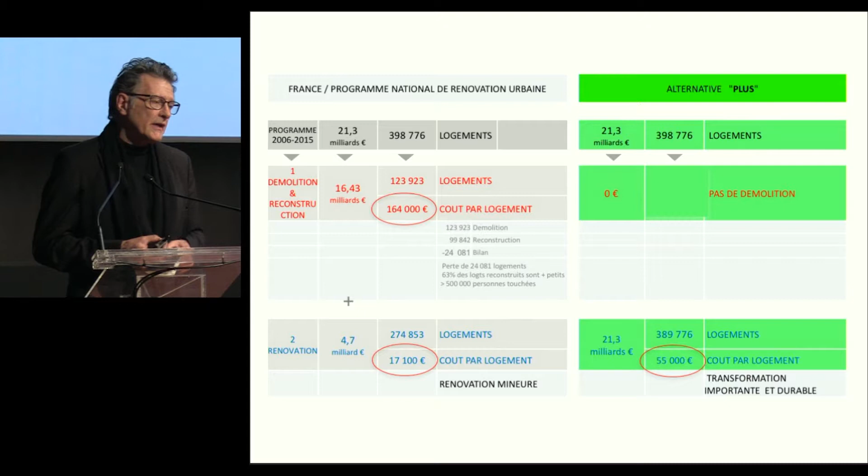traditional rehabilitation, as we've been doing this work for the last 30 or 40 years. And we know that this rehabilitation work will only last for about 4 or 5 years, simply because we keep having to demolish or redo or refurbish. We realize that, unfortunately, most of the buildings, the towers, blocks renovated in the 1980s are the ones that aged the worst and that had to be torn down first.

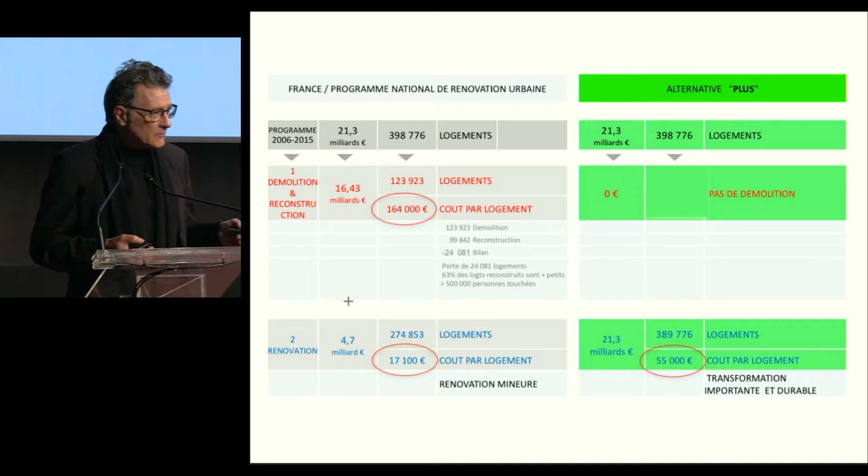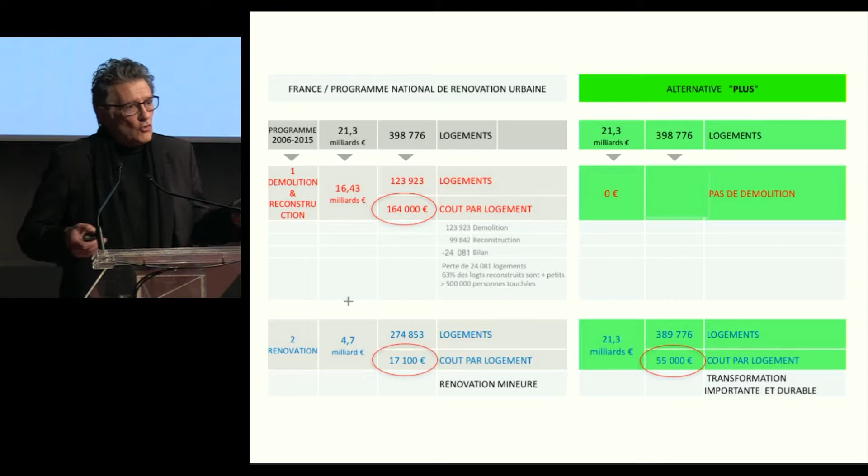So, together with Frédéric and Anne, we really tried to develop alternatives. This is what we call the Plus program, with the exact same amount of money. Rather than spending 164,000 euros per housing unit to demolish it and rebuild it, with 55,000 euros per housing unit, you could do the exact same thing, except that we will produce much larger, vaster living areas, offering a lot more pleasure and happiness to the local residents through transformation rather than demolition followed by reconstruction. So you have to look at things in a new manner.

What we have right now looks like a prison, with small windows. You have to look at things differently. We think we want to open up, give a new perspective, give more possibilities, and this brings us back to the case study house programs of the 1950s in the United States for affordable housing. One of the most beautiful villas on the west coast of the United States were created in this process.

We have to go even one step further. We have to give more freedom. After the facade, you need some space. You need an extension, you want to create a loggia, additional mobility that will give you more pleasure, more freedom, where you could go around the different cities where you live, wherever you are in the city, at whatever floor of the block or the tower.

We want to transform, never demolish, always add, always extend, always give more space, to do more and better, because that's precisely the ambition that we need. We need to do much better than the standard housing unit, much better than the so-called minimum living space.

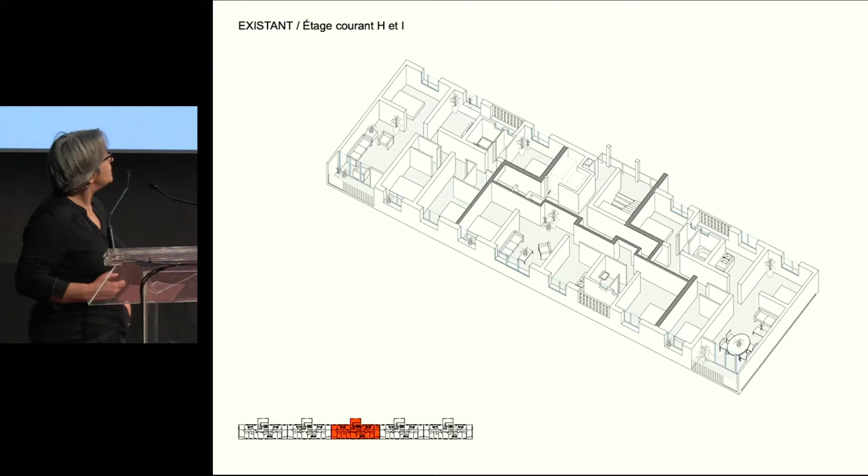So what is missing, you might argue? We're missing some space, don't you agree? We're missing some space to feel more comfortable. You're missing light, you're missing a view. You want to go out and you can't go out. You need a better facade to spend less energy. You need to renovate the lifts, the elevators, the bathrooms. You don't want to be closed off on yourselves, separated from the rest of the world and isolated.

So you want to take the existing blocks, maintain the positive values, and be very ambitious and bold in the transformation process. You want to have inhabited spaces. The 530 families are there. There is no free housing unit to house them temporarily, and there is no solution. You can't transfer them in the neighborhood in any case. So you have to do it while they live there.

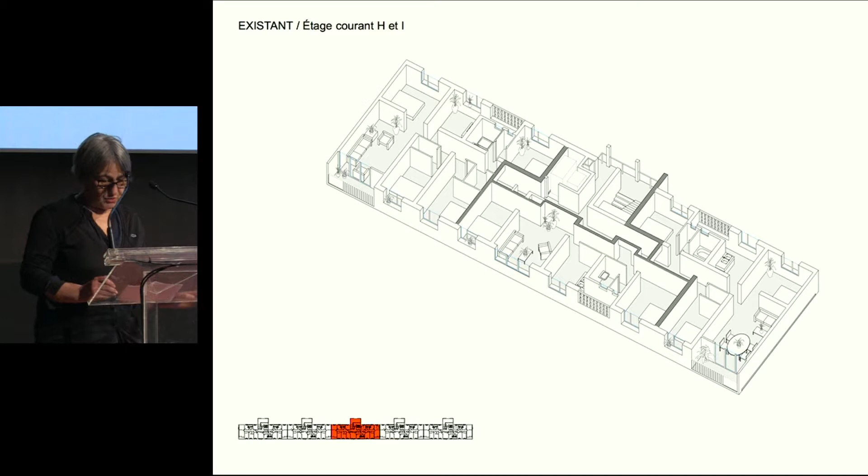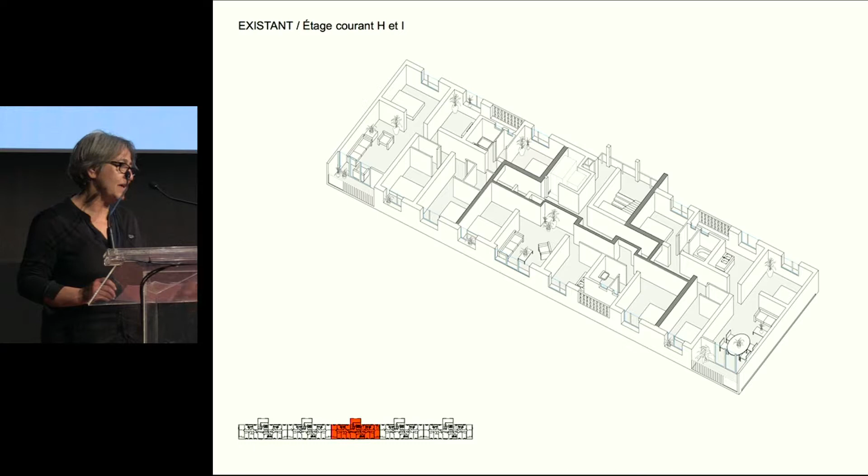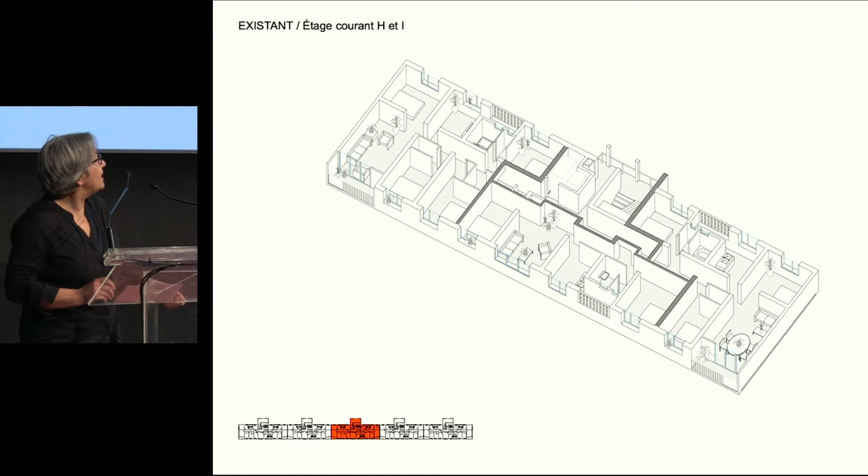So a choice was made to say, okay, we're going to try to add on what already exists, to improve on what already exists. We will touch only what has to be changed, and we have to do it as subtly and delicately as possible, avoiding interior restructuring, which is incompatible with families living there. Such refurbishment would cost a lot of money, and the remodeling money could be used to create more space instead. So we're not talking about renovation here, we're talking about adding space, and this changes totally the situation of these buildings, which should, in fact, keep their intrinsic quality.

The quality of the construction. This is only 1/5 of the major estate.

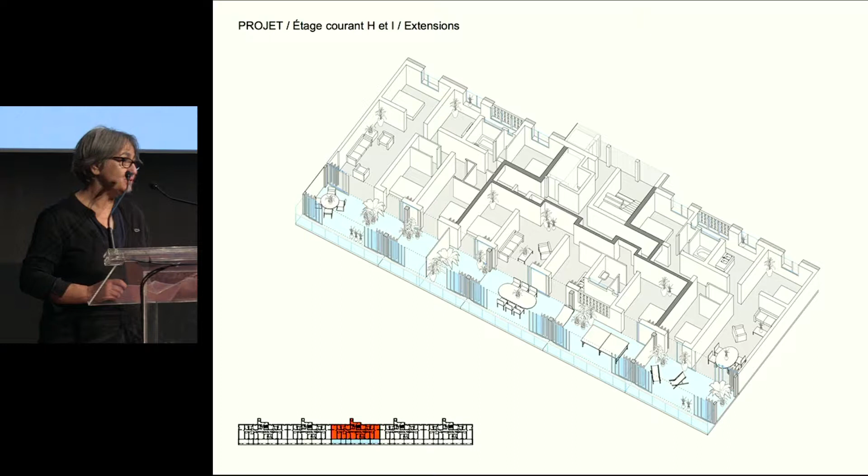We want to have an extension on the front by 4 meters, and this means adding space. You can open the space, you could go out, you could transform all of the windows into French windows, so that from the inside of every room you can move outside. You can use the winter garden and go in through different points, as you would do if you had a garden around your house.

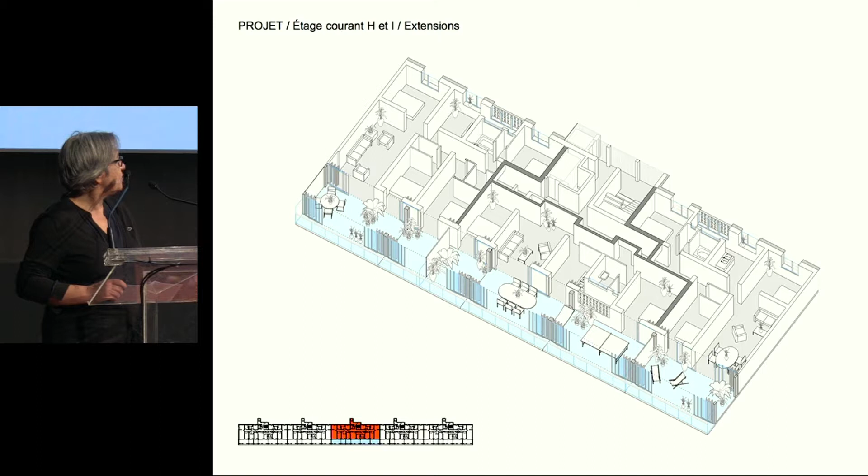Turn these small, congested, large-scale collective housing buildings into villas, into houses that will add some possibilities. Especially we have these winter gardens that are places that could be used to develop a sense of appropriation. They have thermal capabilities because they will also help regulate the problem of energy consumption.

We won't have to add insulators on the facades. It's enough to have the garden. And we can capitalize on the climate, on natural resources, rather than cutting yourself off from these natural climatic conditions. And this, of course, implies that we need to work very systematically, very precisely.

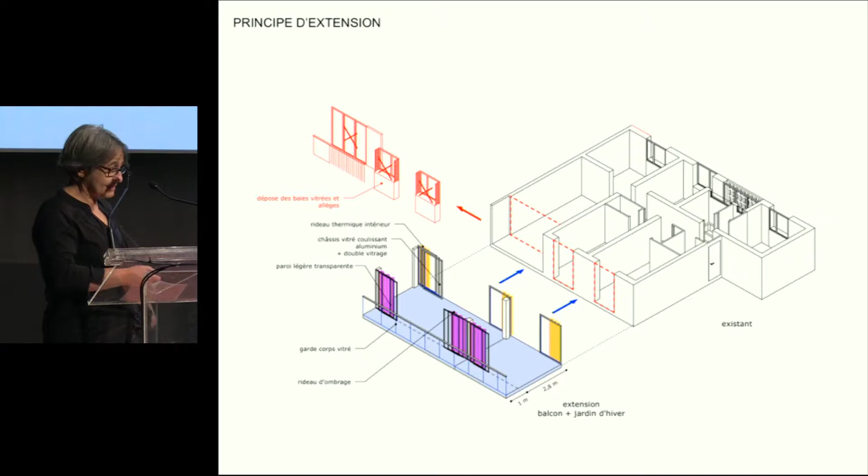The basic principle is that we add space on the outside. We have construction modules that are extending all of the facades. No selection is made. All of the facades will have this. If adding space is good for one housing unit, it is true for all housing units, not for one room only, but for all the rooms.

It is important for all the housing units to be transformed on an equal footing. So you never have to wonder about the fact that the form is different, the appearance is different, wouldn't warrant the addition of such space. It is good for everyone.

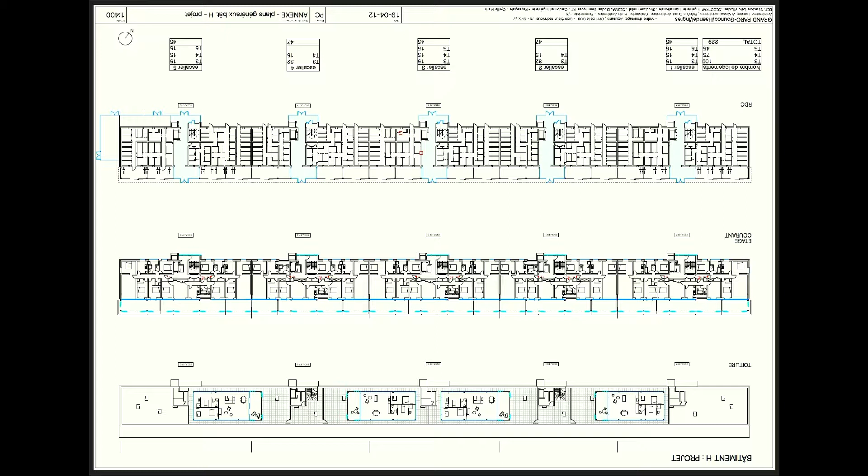And on the roofs, you have some flat surfaces that are added. You can add a few more housing units that can capitalize on all the new situations thus created.

So this is the housing scheme before and after. Doing it on one side, adding space on one side, was enough because all of the housing units had either a southern exposure or they had two exposures. And it was important because we didn't want to spend too much money.

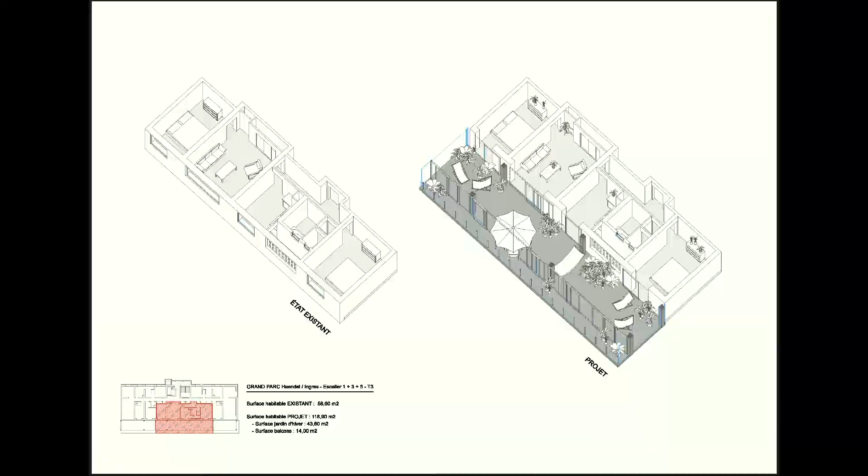All of those taking part in the competition had to spend only an envelope of 40,000 to 50,000 euros per housing unit. Everybody was free to come up with their own solutions, but within that budget envelope. So we wanted to focus on what was a priority. Giving more space, giving more light was seen as a priority.

The project was accepted. It was presented to the local residents and families, and a process was thus implemented. There was a very strong collaboration with Aquitanis, the project owner.

So, of course, we knew that some disruptions had to be taken on board, and we followed this up very closely.

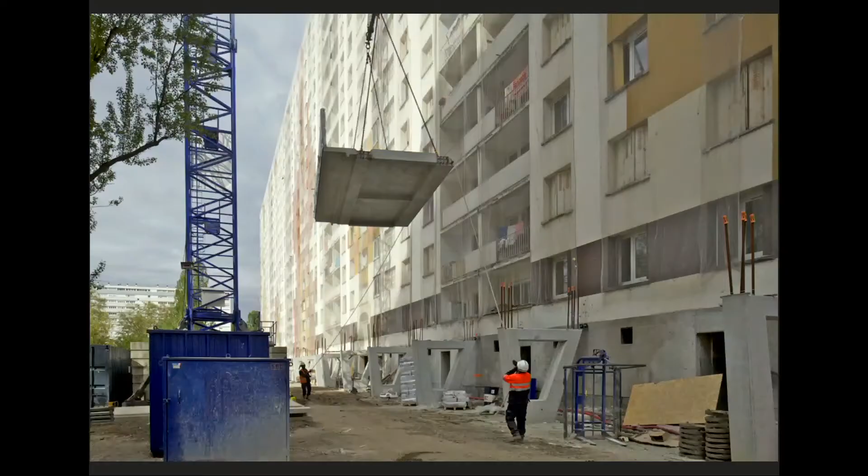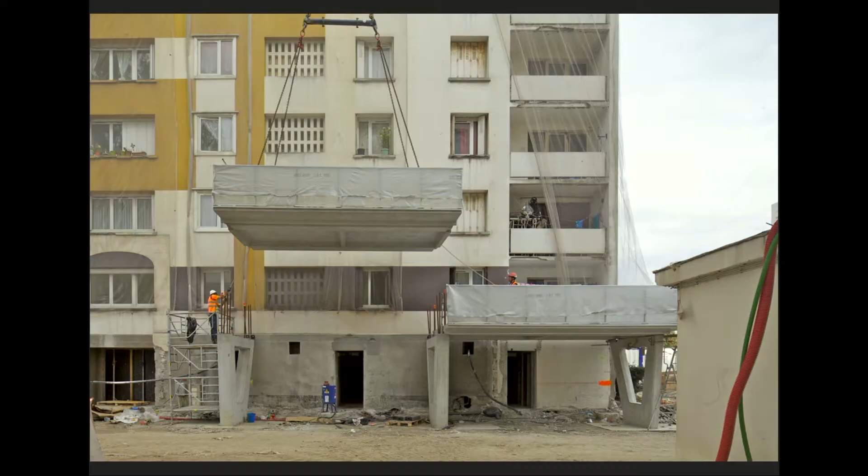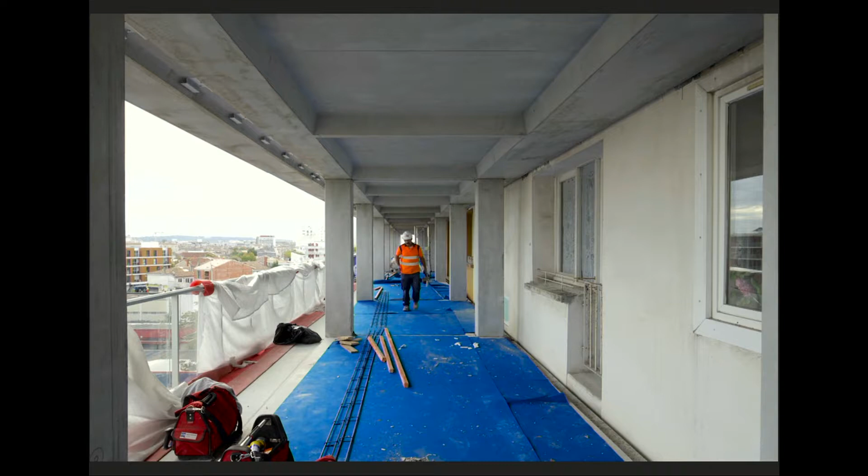So this is a construction process which is perfectly well regulated, very precise, and monitored very closely. We need this because it's on a huge scale, and we didn't want to waste a single day of work. We didn't want to be faced with difficulties, and that's why everything was planned ahead.

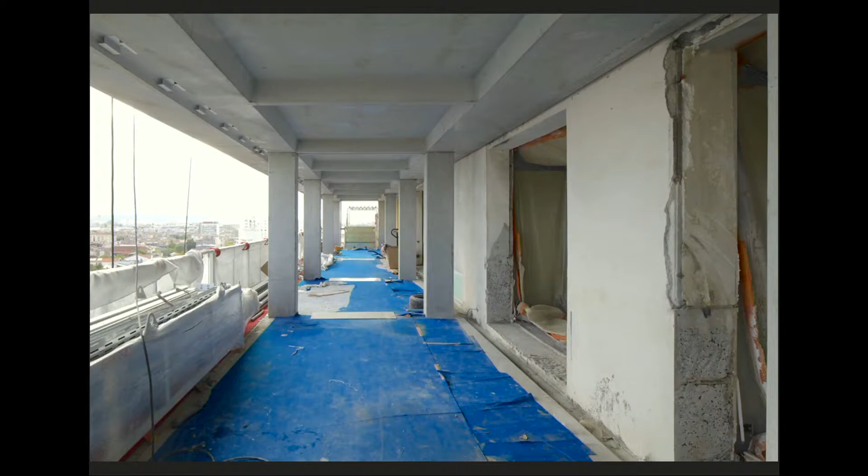And there was a commitment. The residents who wanted to stay in their houses, it was agreed, could during the day have an empty housing unit to stay, but at night they had to go back to their houses.

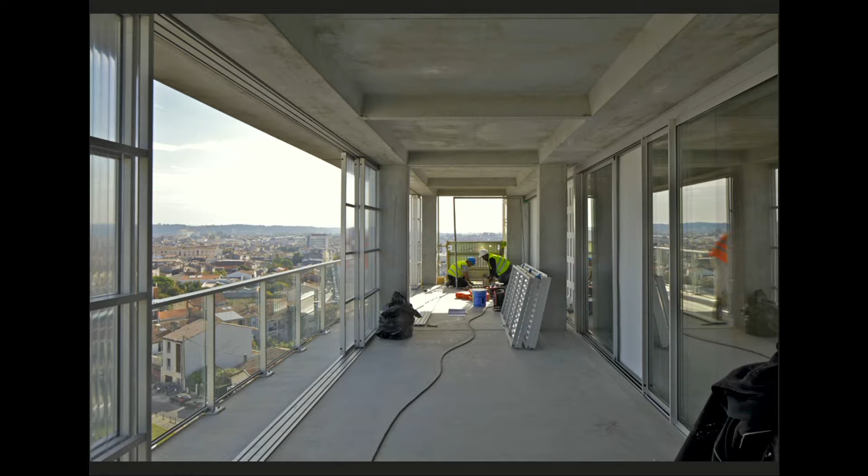So this is what we did to the facades with handrails. We changed the bay windows, and this had to last only 2 days for every housing unit, only 2 days. And of course, we needed a highly competent and skilled company. We need some high degree of monitoring and supervision, and we stuck to these construction times.

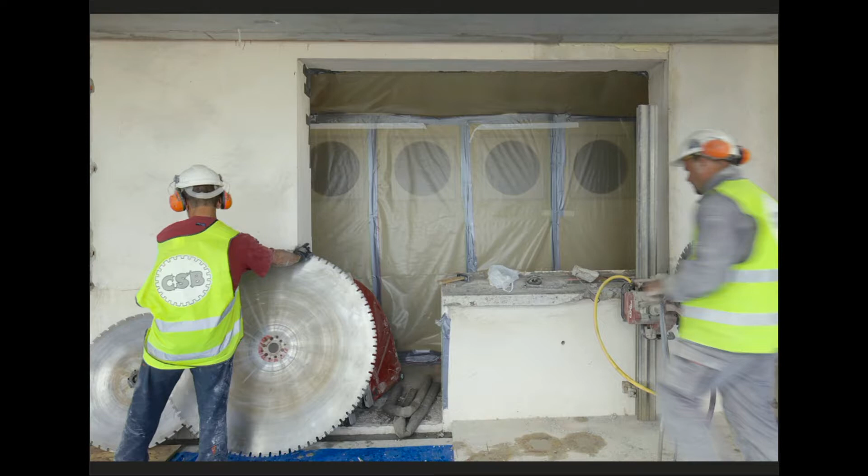And this, of course, also protects the buildings, working within very strict time frames, and we didn't want to cause too much problems to the local residents. So there's a protection system inside so that we don't create too much dust inside.

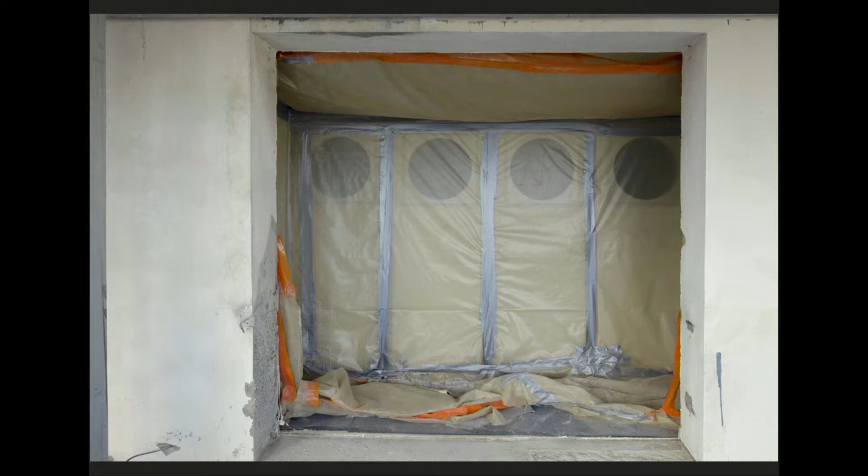The asbestos joints were taken from the facade in the process, were removed, and this is the new facade that arrived, and the finishing work has still to be completed from the outside.

So we moved from this kind of situation. This is the before picture with a window, to the after situation where everything would be opened out onto a winter garden that is 4 meters long that could be used freely by the residents.

Every resident will use it differently, of course. We could see here, again, a diversity of situations. This is a place where the creativity of families can thrive, a place of the expression of creativity on the part of all these families.

We're surprised because as soon as the space became available, it was owned in a way by the families. No explanation was needed. The space was used quite simply. By engaging in this transformation, we also transformed the neighborhood. This housing unit has been transformed, and there was a building next door that was going to undergo a similar renovation, and it changes the entire appearance of the neighborhood.

So these housing units are transformed in a sustainable fashion because they offer very generous space conditions, more space, more light, a better view, a better climatic environment, less power being used, and collaborative work was done, strict collaboration involving the major partners, the client, the project owner, the contractor, and also the residents who have to be involved in this process. They are engaged not as mere stakeholders informed once in a blue moon, but as fully fledged partners that do their own bit, not to build the project itself or be involved in construction, but to make sure their rights as residents and their appetites are followed up closely and respected.

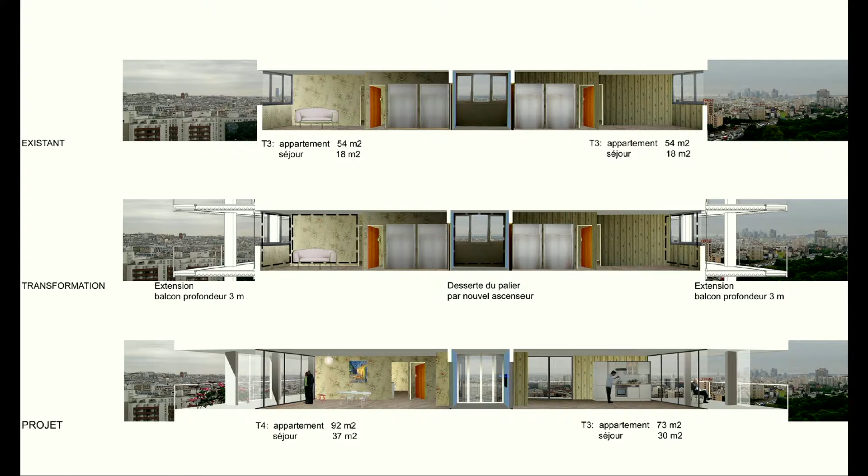There was to be no increase in the rent, as in Bordeaux, except that the general overall expenses were going to be increased somewhat. But less was paid in energy bills, as we said. So this is different from Bordeaux, however.

There was a particular request put forward by families. Looking at the tower when we started working and consulting with the families, we realized there were real family-based needs. The tower could not really welcome all the people living in it. So before working on every housing unit, we had to work on the organization of new typologies and the question of the extension of the inhabitability of the building.

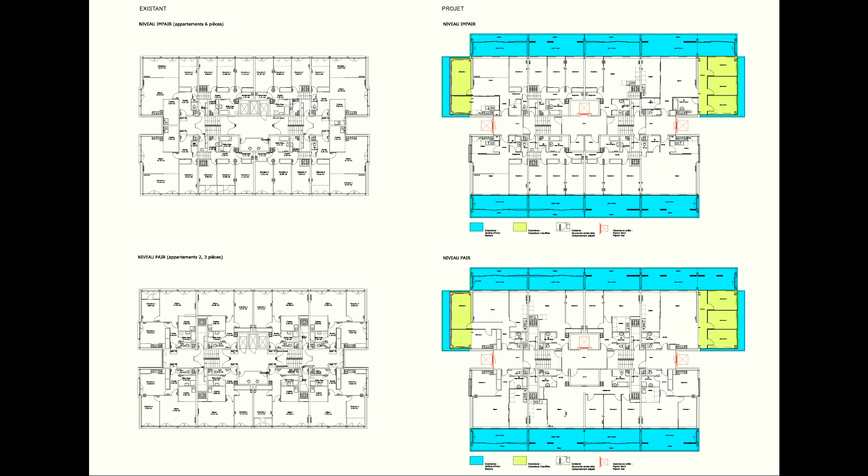That's why on the left-hand side you have the existing layout plans. There are two levels, not exactly on each other. On the right is what we've suggested. In yellow, you have the extensions we've suggested to house all the people already living in the tower. So we're going to increase the habitability capacity of the tower itself, and then give to every family, not in a haphazard fashion, the ability to get out, to be in the open air, to have more light streaming in, and to have an expansion of space.

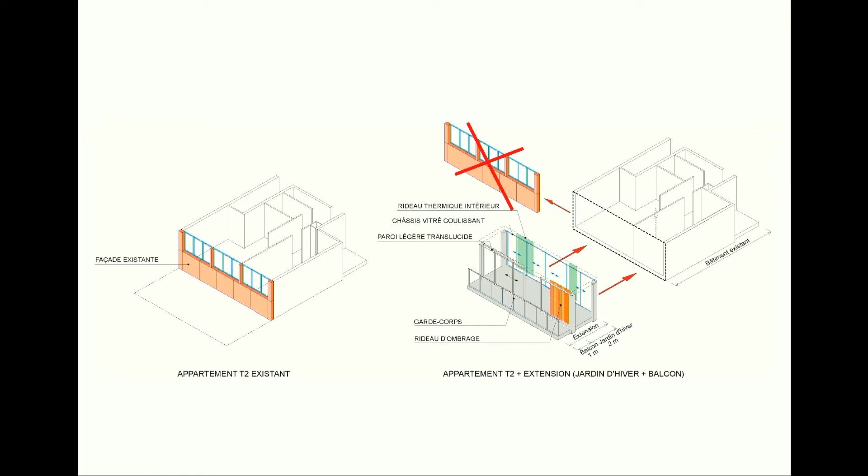It's easier than in Bordeaux. The facade is light, well designed, and could be removed very easily. To replace this light facade, you can organize a winter garden and a balcony, a bit smaller however than in Bordeaux, not 4 meters. That's why in Bordeaux we had more money and built a bigger garden. So to the left is what already exists, and on the right, the addition of a space at every level.

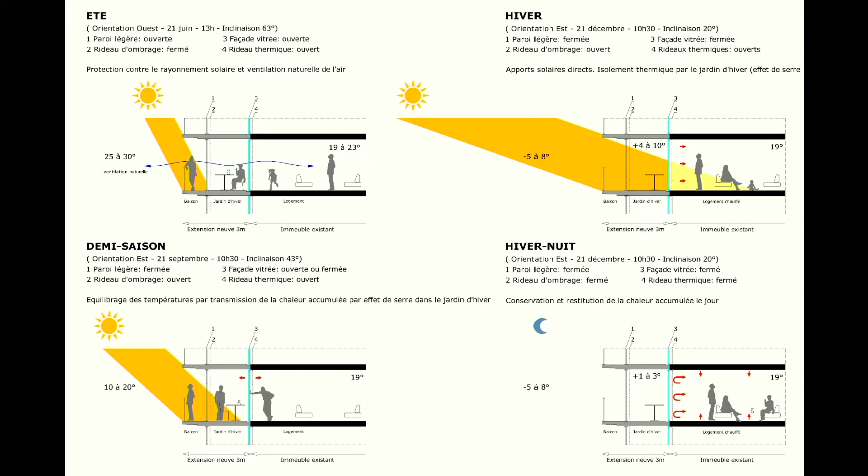Now what's important here is the issue of climatic conditions. Generally speaking, people talk about insulation. Insulation is always an objective, but adding 20 centimeters of mineral insulator next to every window is hardly sustainable. Nobody wants to add 20 centimeters of mineral wool. It's much better to have a winter garden on your balconies. The performance of this layout is much better than the insulator you'd be adding around your windows, which we'll have to remove 10 years from now because we know its polluting power is very high.

So in the tower, differently from Bordeaux this time, in this project, talking about readjusting the capacities of all the housing units to take care of the needs of the families, we needed to add space. So there's a particular complexity here. We're having to supply to every individual the right typology of housing unit within the tower.

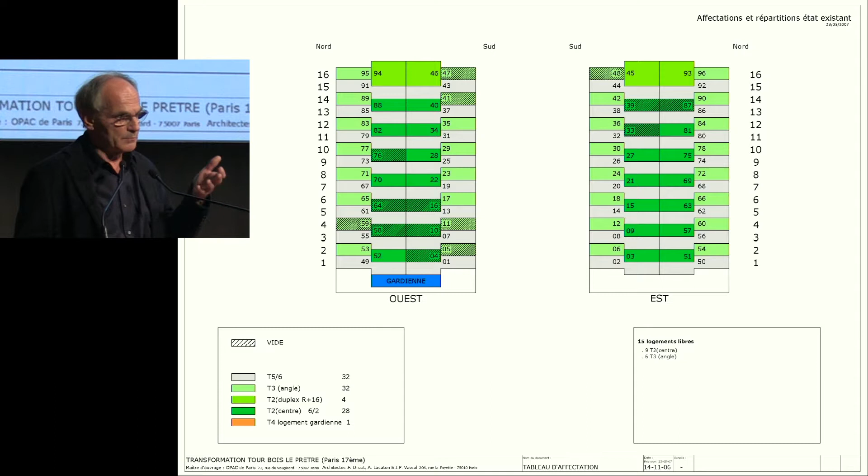For example, there are some families that had a big apartment and they end up as a family of 2, so they want to have 2 small housing units rather than a big one because they have adult children, for example, or it could be the other way around. So 40% of the people decided to stay in their original apartments, and 60% of the people are going to rotate and take up other living spaces.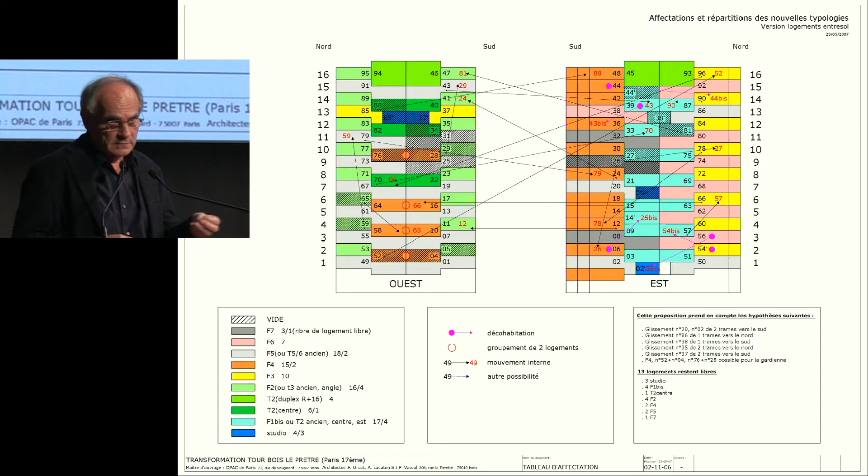We have to do this kind of work. We have to offer up new spaces, new flats to these families to see whether they would agree with the proposal extended to them. If we don't do this work, nobody will do it, and the family will be told there is no apartment for you here now, so you have to leave. It is part of our mission and assignment as an architect. All of this will have to be listed in registers.

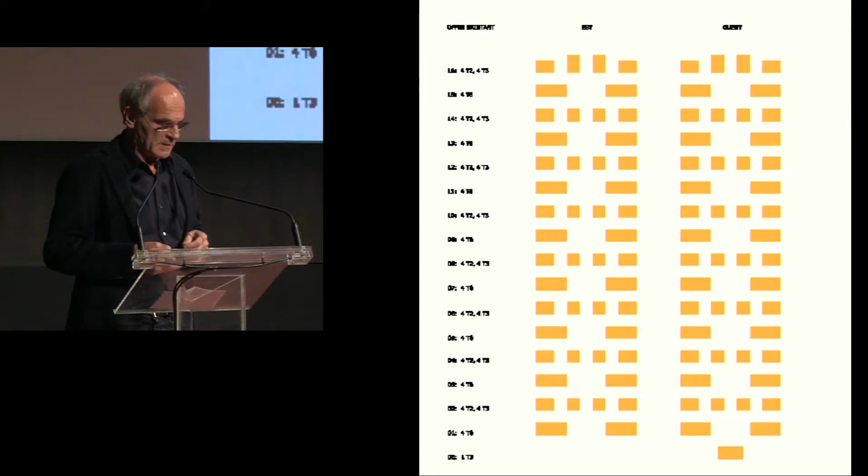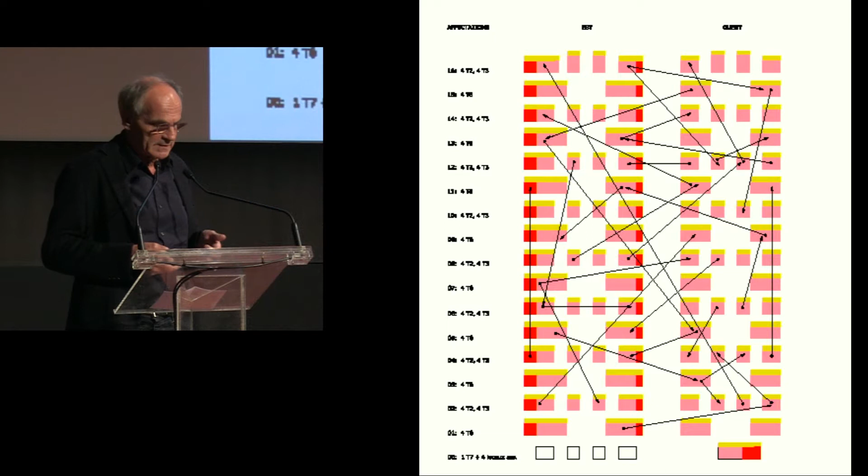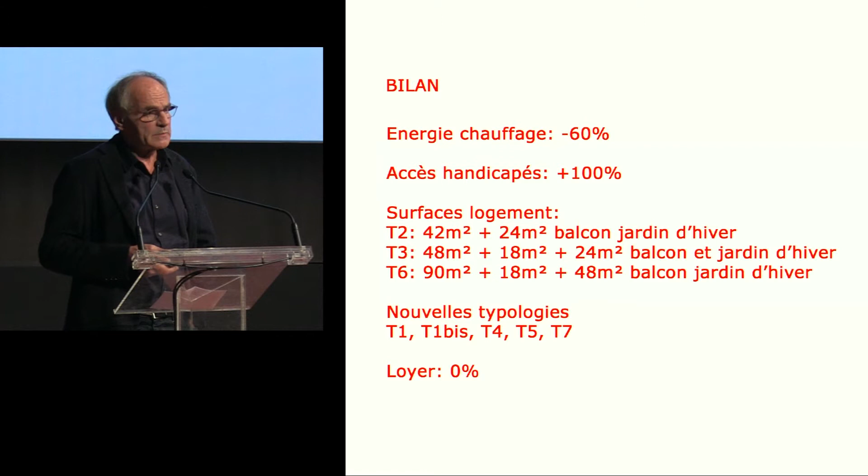We have families who know their needs. Just to summarize, we have a building, we have needs for additional rooms. We can build this as architects. We often add, because we're very generous, winter gardens, and then we have to find flats suitable to the family sizes. So we reduced energy by 60%. The rent did not increase, and there's all-around accessibility to the housing units, including for disabled persons.

So this is the tower, the work that was done, and this is now for one facade. In 1 month, we established a whole facade of balconies. The finishing work hasn't been completed yet, but that's how long it took.

So this is what it looks like now. This is the before picture. Back in the 1990s, we had safety and security issues in France, and it looked like a prison. We decided to paint a little sun on the fence to make it look less like a prison. But anyway, this is what it looks like now.

This is the before picture, very convenient. At the end of the steps, you get some light, but this is what it's turned into. This is the before picture, very cluttered, but we could feel that there was a little love here, a little human attention going on, a story being unfolded, and this is what the housing unit looks like now.

And the flat looks like this today. And of course, it's never the same because families don't use the winter gardens in the same way. Some people like to sew, other people like to have a drink in the evening. It's not our problem, it's their lives, isn't it? We're here to add space.

We're happy to know and to see that little by little, in a different way than in Bordeaux, people decided to use their spaces. Some people were a bit hesitant. They used their winter garden in a way and then decided to change the furniture.

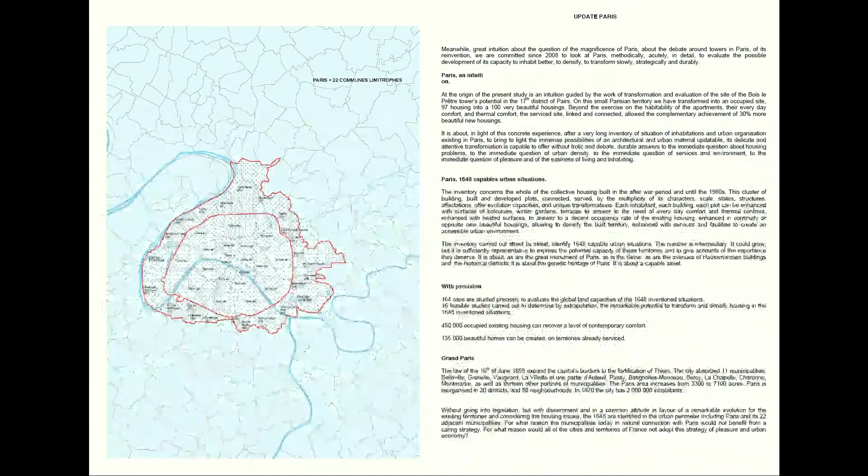In 2008, the Greater Paris project was launched. I don't know why, but the question of housing was forgotten as part of this Greater Paris project. If everybody starts living in the suburbs and no one lives in Paris, it's going to be a problem. So we engaged in very meticulous, precise research work coming from the Tour Bois-le-Prêtre experience, the first project in Paris that we mentioned.

In the project that we did, we knew that we had the capacity to have already 120 flats rather than 100, simply by working on the tower, on the building. Working now on the land plot around it, we realized that we can build an additional 30 housing units. So in very small areas in Paris, by taking care of people, taking care of trees, by providing large housing units, we can move from 97 to 130 or 140 housing units.

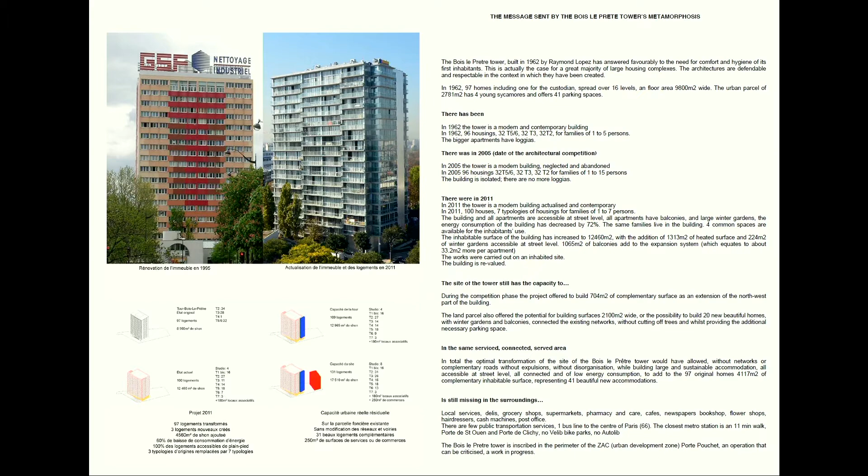We didn't demolish buildings, we didn't cut trees, we didn't have to rebuild streets, we didn't have to buy land because the land was already secured, which means the overall economy of all of this is much better, much more positive than a mixed area, a zone that we would want to create. And this would mean building new roads, buying new land, etc. So this has to do with the quality of the housing units, and this gives you more economic capability.

So we decided to do something that is pretty amazing. We tried to identify systematically all of the situations in Paris that could allow for this kind of project, where we could transform existing flats, 450,000 existing flats, and increase on the existing territories about 135,000 housing units. We didn't come up with a project.

We tried to evaluate very precisely the capacity of a city, of an organized territory, to increase the living density systematically. There are some situations where sometimes you can add 1 housing unit, sometimes 10, sometimes 40, but it's never done consistently or generically. There's a sheer diversity of situations.

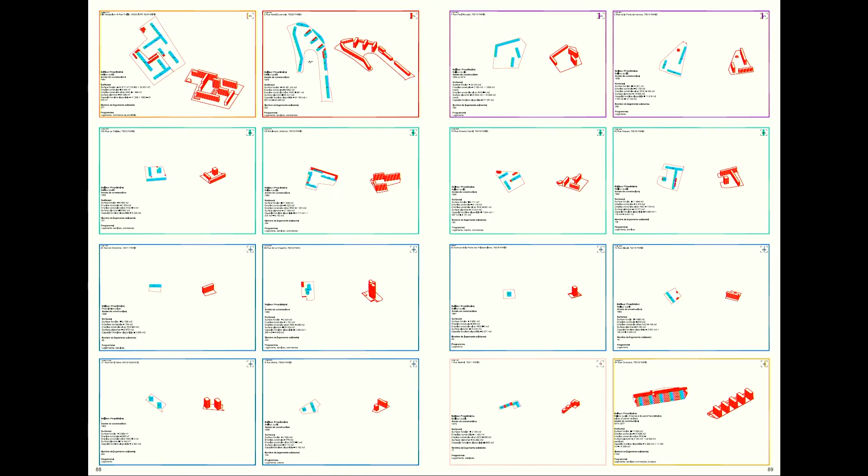In Paris, we took the 22 municipalities around Paris, because obviously when we go beyond the ring road, we're still in Paris. You could see in blue or in red all of the areas where we could do some work and densify the population. Every situation is put in an inventory, and we draw up a sheet with the details of these pieces of land, and we see what can be done.

You have to know the owner, you have to know the surface area exactly, you have to know a great many features and characteristics, and that's what we try to do. We try to evaluate the capability of every area, looking at the construction system, the capabilities, the regulations and construction rules that were followed, plus objective rules that have to be complied with.

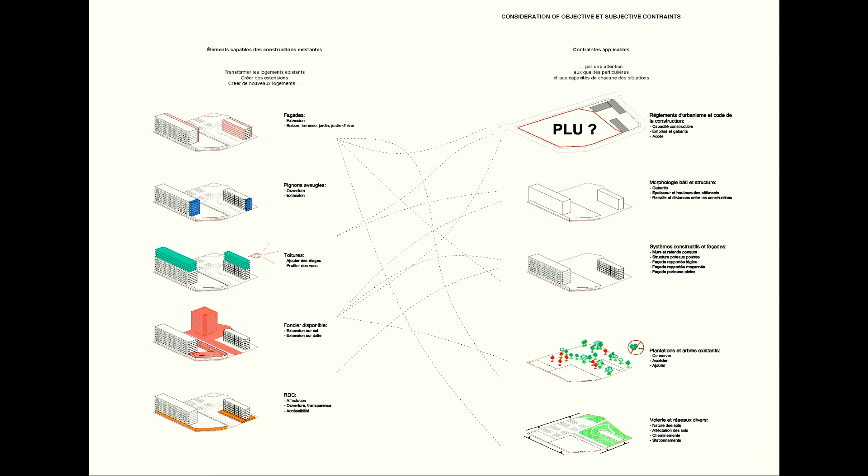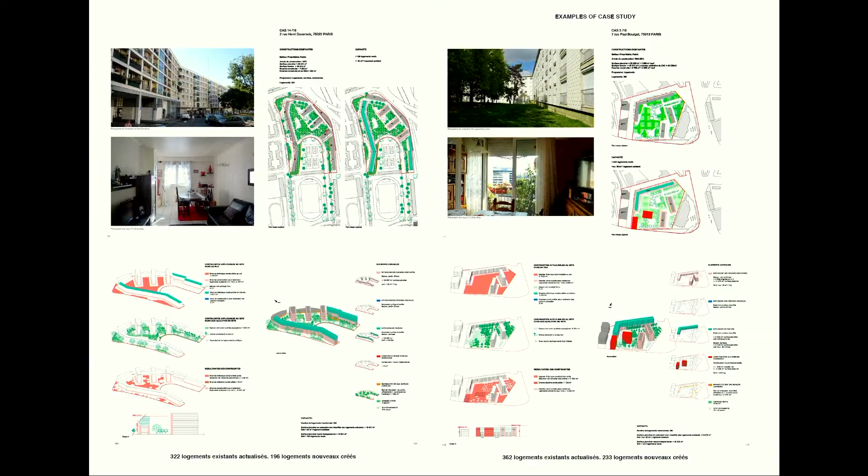We want to keep the trees, keep the views, consider the situation of existing families who live in these flats. So we have descriptive sheets, and we could see, for example, on this side we could build 240 additional flats, and others only 22, and this gives us a total of 135,000 housing units, which means that the block plan, this aerial picture of Paris, is exactly the same before and after. You're not adding any land, except that you will have densified and added 135,000.

Beginning of the century, in Paris there were 3 million inhabitants. Today, only 2 million and a bit. Where has the other million gone to? So the quality of housing is important, but we have to look at capable urban situations.

So we work like ants. We're looking very strictly at the different housing units. We could also do it at the scale of a neighborhood or a district. We wouldn't have to look at mixed use areas, but you could say, okay, this is the walkable community. You could go to your subway station, to the taxi station, all around you, the neighborhood.

Maybe we should look at these walkable communities and see what is the possibility to improve life in the neighborhood. Maybe there's something missing. Maybe there's a post that needs to be rebuilt. Maybe there are different scales of action that are possible.

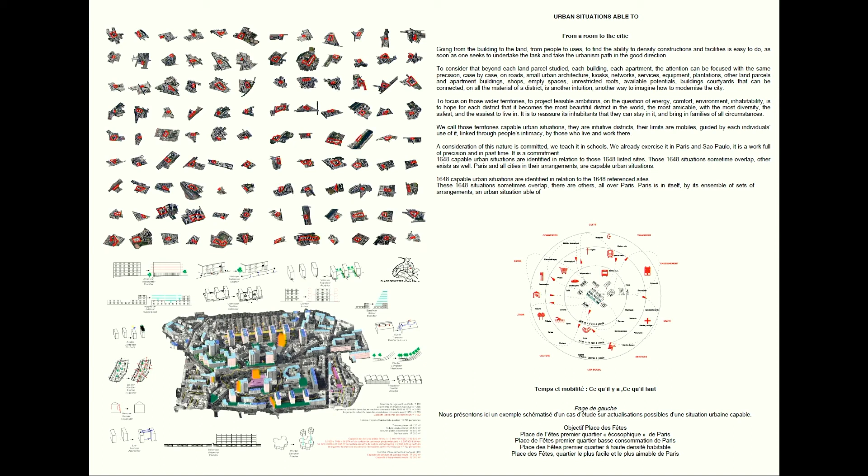And generally speaking, if we looked at the Place des Fêtes square, for example, we saw that exactly there, in the 19th district in Paris, we could create another 2,000 housing units or flats without buying new land, simply by improving existing housing spaces, so that some activities could be created. So we could just improve the habitability of cities.

We get tired in the process, but we derive a lot of joy from this activity. Thank you.